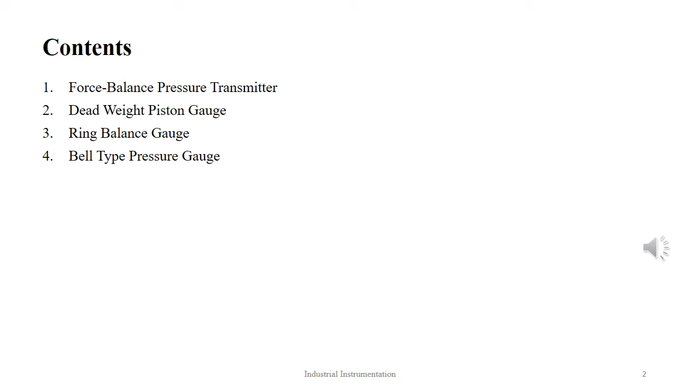In this tutorial on industrial instrumentation, we will talk about pressure measurement part 5, and here we will talk about the various types of force balance pressure transmitters. The topics of discussion in this tutorial are force balance pressure transmitter, under which there are three types. They are dead weight piston gauge, ring balance gauge, and bell type pressure gauge.

Pressure can easily be converted to force if we know the surface area on which it is exerted. The pressurized surface for a pneumatic system can be a bellow or a diaphragm. These devices normally have elastic elements as the pressure sensing surface. A balance force is generated for this type of pneumatic pressure meters in order to cancel out the applied force due to the applied pressure.

The instruments which measure unknown pressure by monitoring the balancing force come under the category of force balance pressure gauge. The force balance transmitters are more or less linear in nature and are capable of giving continuous measurement. These devices have application in calibration of other pressure transmitters. Largely classifying, there are three types of force balance gauge, which are dead weight piston gauge, ring balance gauge, and bell type pressure gauge.

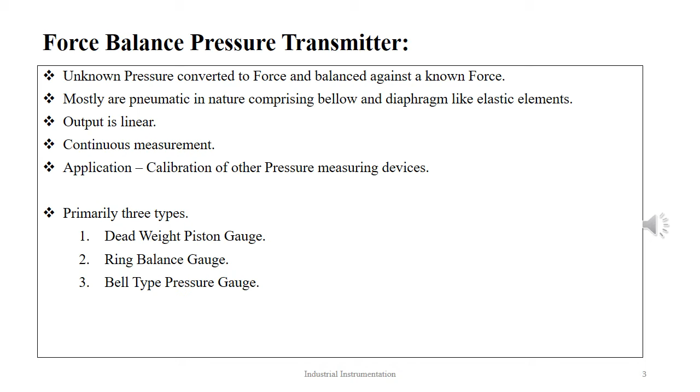The dead weight piston gauge measures pressure in fundamental units of force and area. Here, a piston which is made up of tungsten carbide is inserted in a closely fitting cylinder and weights are placed at one end of the piston. The device consists of an accurately machined and tightly fitted piston inserted in the bore of the cylinder. The cross-sectional area of both the piston and the cylinder are accurately known.

A platform is made where the balancing weight is placed to obtain the necessary balance. There is an oil reservoir at the bottom part provided with check valves. The oil is sucked up using displacement pumps on their upward stroke as and when required.

The measurement range is between 20 kPa to 300 kPa with an accuracy of the order 0.1 millibar, that is 10 Pascal. New modified versions can measure pressure as high as 80 megapascal, but they are custom made and are not readily available. The pressure measurement takes into account the factors of errors due to the effective measurement cylinder area, buoyancy, gravity, and ambient temperature.

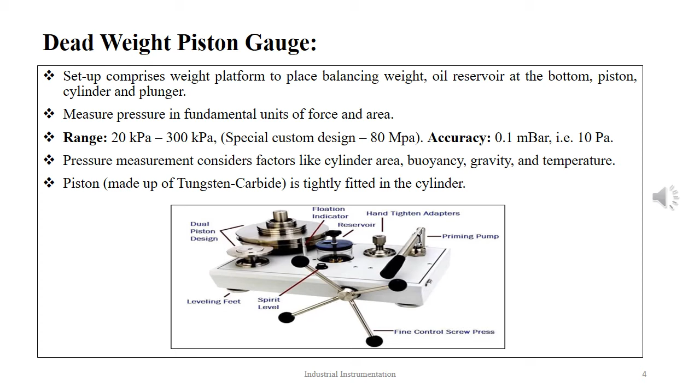The piston is fitted in the cylinder having a clearance of few millimeters and is rotated to minimize friction. The weight balances the applied pressure by the fluid in the piston fitted in the cylinder bore. The dead weight testers are so called as they use dead static fixed weights to determine the pressure in closed compressed fluid systems.

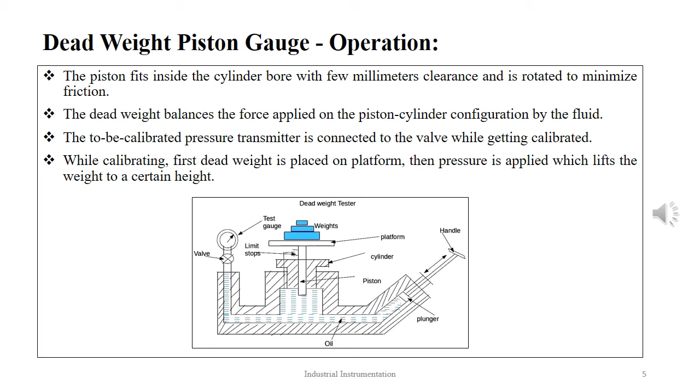In order to calibrate other transmitters, a known weight is first placed on the weight platform and then fluid pressure is applied using the plunger. The pressure applied is so adjusted that the weight is lifted. The tester calibrates the pressure by determining the weight or force and the area on which the force is applied. We first put the weight in the weight platform and then apply pressure using the plunger with the handle. The meter under calibration is affixed above the valve position as shown in the figure.

The advantages of the dead weight piston gauge are that it is simple in design, construction and usage. It can be used to calibrate other pressure transmitters over a wide range. The fluid pressure is easily altered by adding weights or changing the piston cylinder combination.

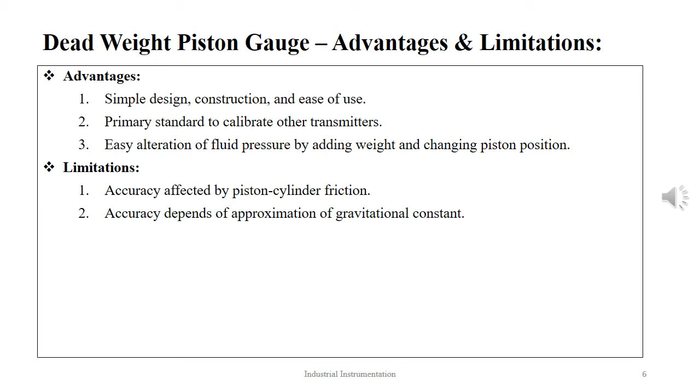The limitations are that the dead weight tester accuracy is affected by friction between the piston and the cylinder. The measurement accuracy is dependent on the decimal significant value of the gravitational constant.

The ring balance gauge was covered in the manometer pressure measurement segment. It is the second type of force balance pressure transmitter. It is used for measuring low differential pressure. The tube is made up of polythene or aluminum-based alloy or some other transparent material. It is bent in the form of a ring, supported at the center with a knife-edge pivot.

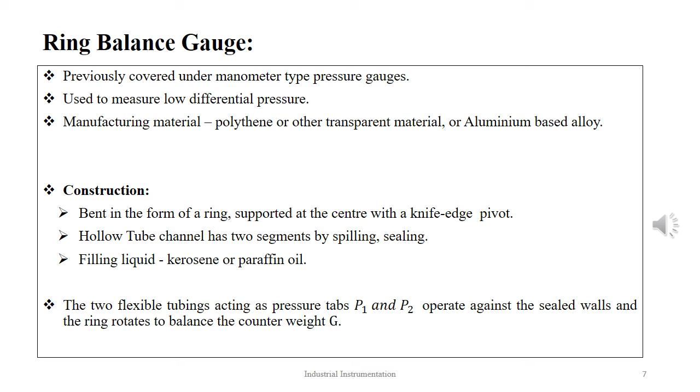The hollow tube channel is divided into two segments by sealing and filling with suitable light liquid, namely kerosene or paraffin oil. The two flexible tubings acting as pressure taps P1 and P2 operate against the sealed walls and the ring rotates to balance the counterweight G. The calibration of the ring balance is obtained by means of balancing the weight G. It is the rotation of the ring that indicates the pressure difference.

The differential pressure is indicated by the position of the partitioning wall A, and S is the flexible tubing distance indicating positive and negative differential pressure applied to the ring body, with small r being the radial distance. The differential pressure is determined by the following equation: ΔP = P1 − P2 = (Gs / Ar) × sin α.

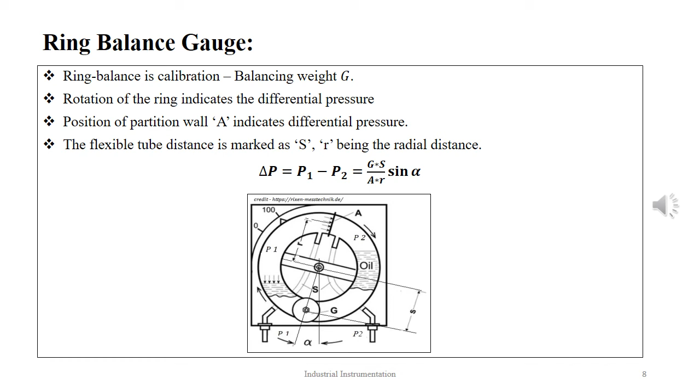The bell-type pressure gauge is a type of differential pressure meter. Here the force that is produced inside and outside the bell is balanced against a weight by spring compression. It is used for sensitive small range low pressure measurement. The range of pressure measurement for static pressure is 4 to 6 megapascal, and for differential pressure it is 0.06

to 4 kilopascal. The thickness, density and area of cross-section of the bell and the density of the sealing liquid, the elasticity of the spring arrangement are all calculated in order to find out the exact measurement range. The bell gauge finds application in low differential pressure measurement and in control of furnace and draft conditions.

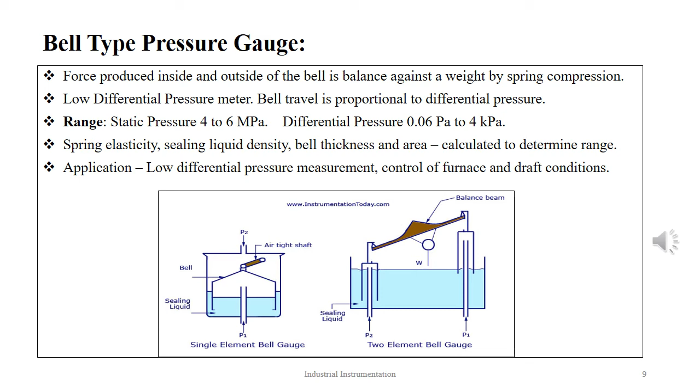There are basically two types of bell gauge, and those are thick wall type and thin wall type. In the thick wall type, the sealed chamber is made up of cast iron filled with sealing liquid mercury. Here the inside pressure is higher than the outside pressure. In the thin wall bell gauge, the bell is thinner in construction and the control is achieved by means of a spring arrangement. Here, high pressure is applied at the outside and lower pressure is applied at the inside.

The force difference due to the pressure causes changes in the length of the spring, eventually changing the position of the bell. The travel is proportional to the differential pressure. The range is determined here by the modulus of elasticity of the spring and the density of the sealing liquid.

There are also other categories: single inverted bell element for static pressure, where the device is stationed at the measurement point without atmospheric pressure compensation, and two element inverted bell gauge for differential pressure with atmospheric pressure compensation. In the single element bell gauge, only one bell jar is suspended in an inverted manner immersed in oil. As the pressure rises, the bell also moves up and balances a counterweight on the opposite end. This movement is transmitted via mechanical links expressed in pressure terms.

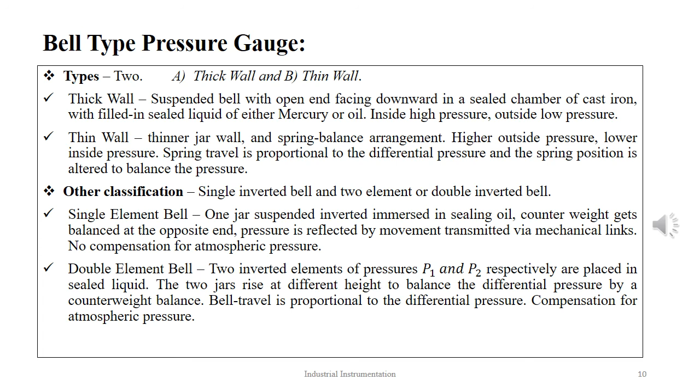As the bell jar rises, a smaller portion of it is immersed in the sealing liquid and the upward thrust due to buoyancy is reduced and apparently the weight increases. As the inside pressure is greater than the outside, it causes the outside level to be more than the inside liquid level, and the bell rises. The bell travel is proportional to the differential pressure.